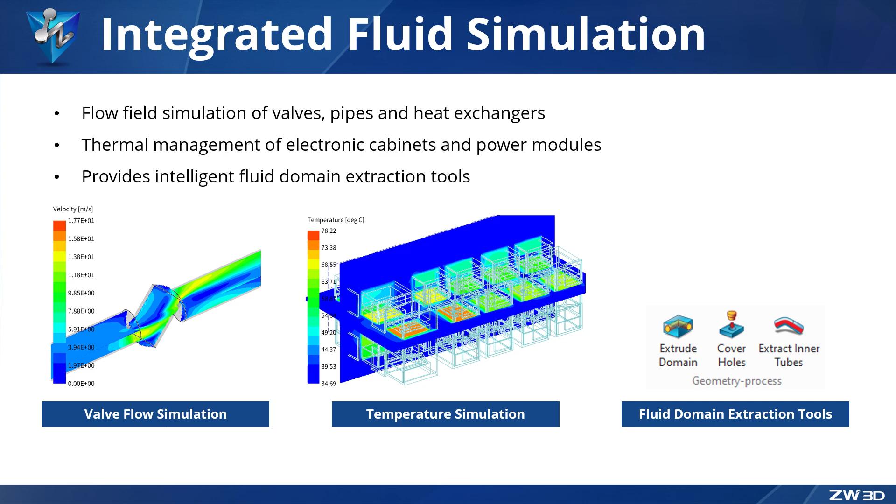Additionally, it offers an intelligent fluid domain extraction tool to simplify complex fluid domain extraction operations. Next, we will demonstrate how to perform a flow simulation for the valve. Click Simulation, New Fluid in the ribbon bar to create a fluid simulation task for the valve.

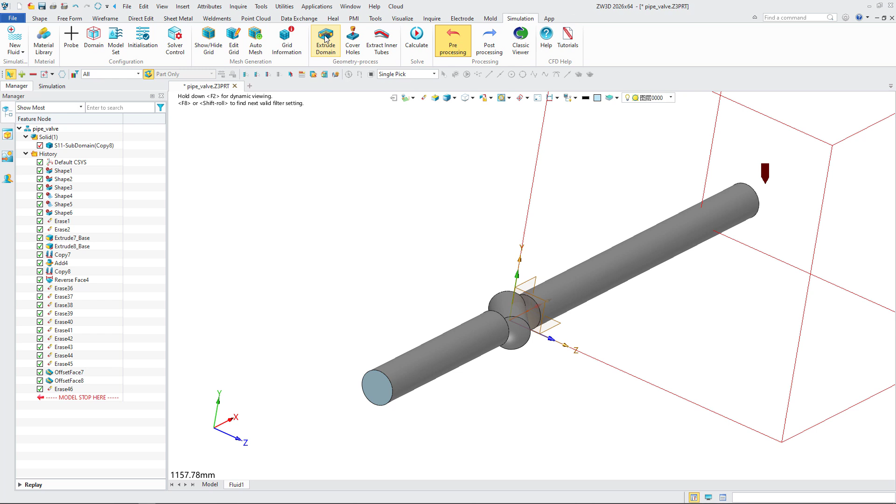First, create sealing caps at the valve's inlet and outlet. Then extract the internal fluid domain of the valve. Remove the valve's outer shell and sealing caps while retaining the fluid domain. Finally, generate an envelope domain encompassing the fluid domain.

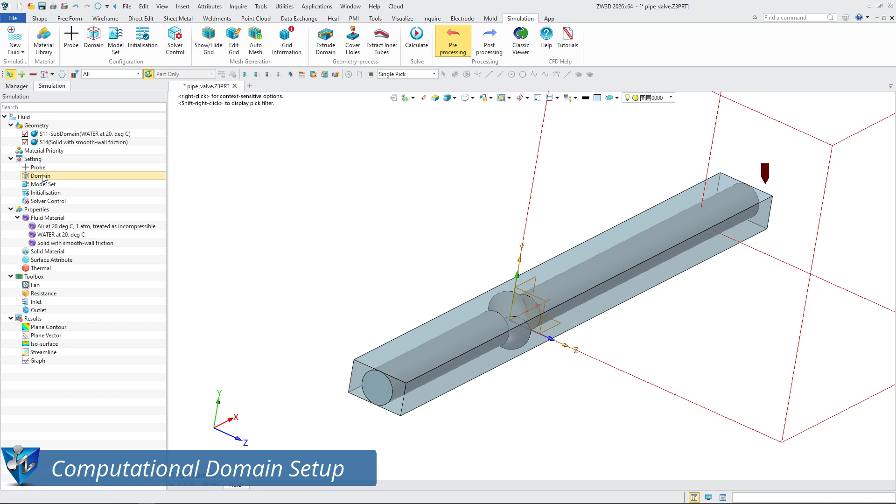Assign water as the material to the fluid domain. Define the envelope domain material as a solid with smooth-wall friction. Set the water material with highest priority in overlapping regions. Set the computational domain size to match the enveloping domain dimensions, and the probe positioned at the valve's center.

Set the negative X direction as the inlet of the valve, with the inlet velocity being 3 meters per second. Set the positive X direction as the outlet of the valve, with the outlet pressure being the atmospheric pressure, and keep the default settings unchanged. Set the boundary conditions of other directions as the wall, and keep the wall parameters unchanged by default.

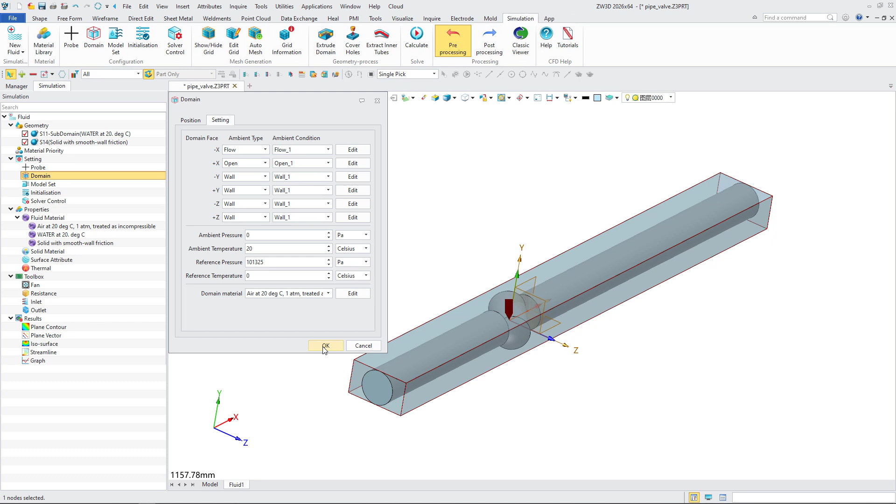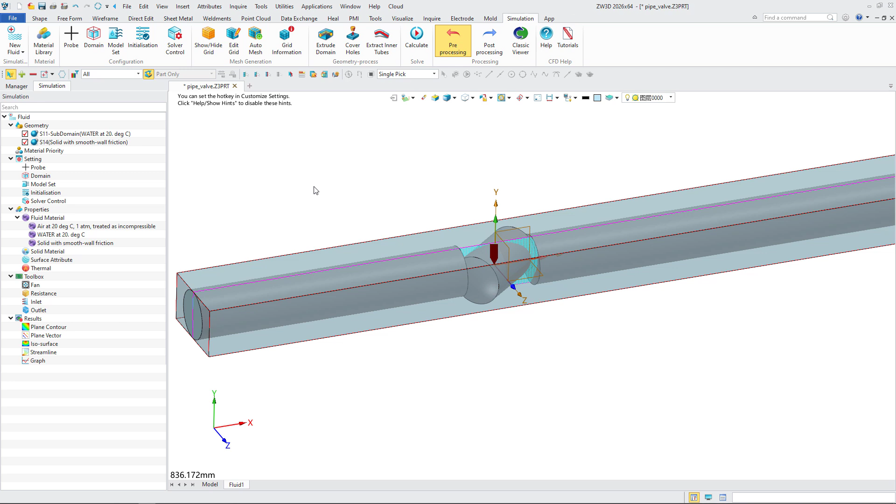Select the standard K-epsilon turbulence model and enable output of total pressure results. Configure 8-core parallel computing for the solver. Set the number of grids in the X direction to 300, the number of grids in the Y direction to 50, the number of grids in the Z direction to 80, and set the mesh size to uniform distribution. After submitting the calculation, monitor data in real time via the monitoring panel to assess result stability.

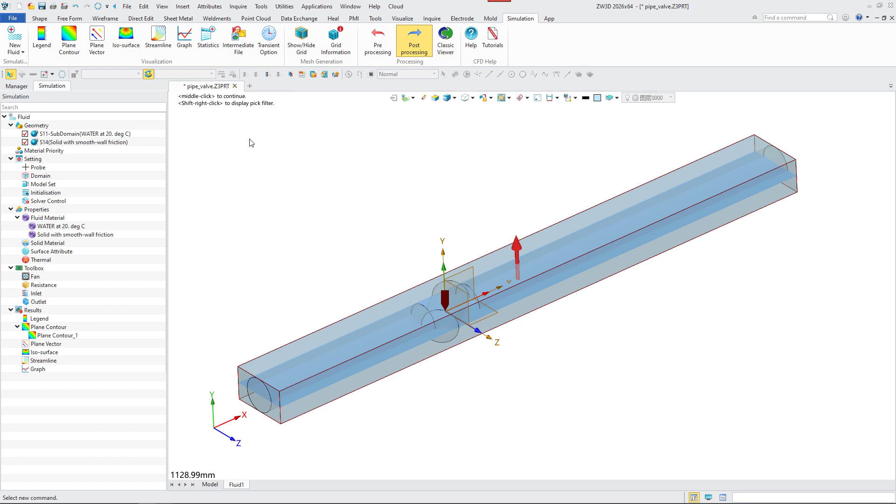The fluid domain of the valve is transparently displayed, and the pressure contour of the cross-section of the valve is created. The results show a significant pressure difference between the front and rear of the valve, with negative pressure observed downstream. Generate a mid-plane velocity contour.

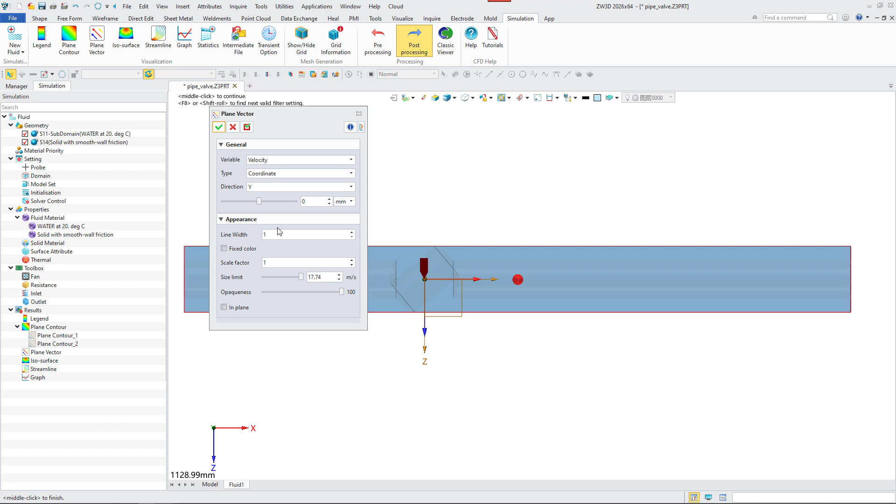Results indicate higher flow velocity near the wall on one side and lower velocity on the opposite side after water exits the valve. By creating a vector diagram, we visualized flow direction within the valve, revealing a large recirculation zone downstream. By creating streamlines of the water flow, the flow path of the water flow can be seen more directly, and the return area of the valve can be identified. The above is the case of valve flow simulation.